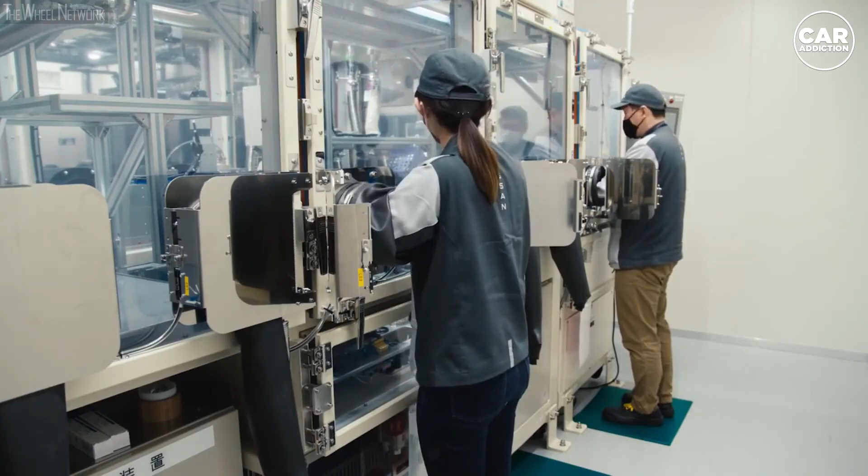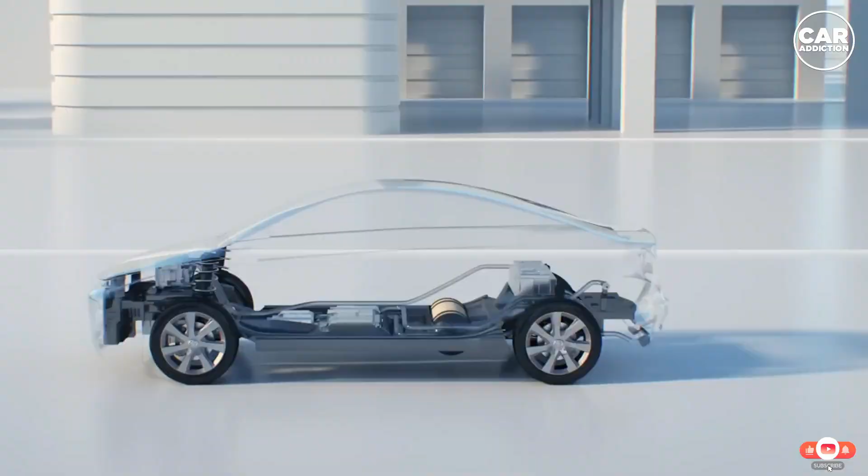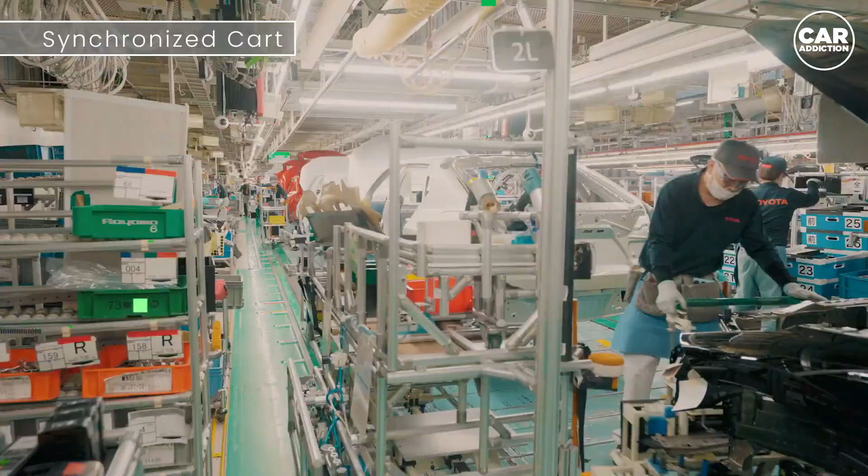New Toyota boss says solid-state batteries and synthetic fuels still need to evolve. Like his predecessor, Koji Sato believes hydrogen has a future. Replacing Akio Toyoda at the helm of the Japanese automotive giant, Koji Sato was appointed CEO on April 1. In an extended interview with Autocar, he spoke about how the world's best-selling car manufacturer should work on lowering its emissions on the road to becoming carbon neutral by the middle of the century per the Toyota Environmental Challenge 2050.

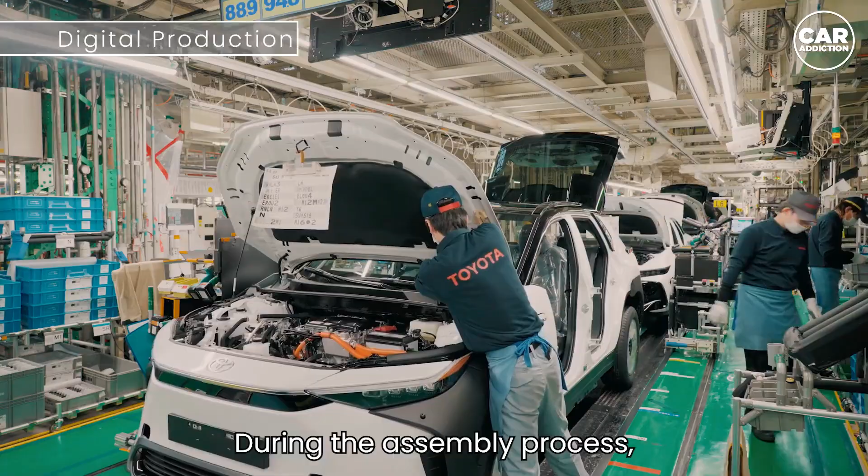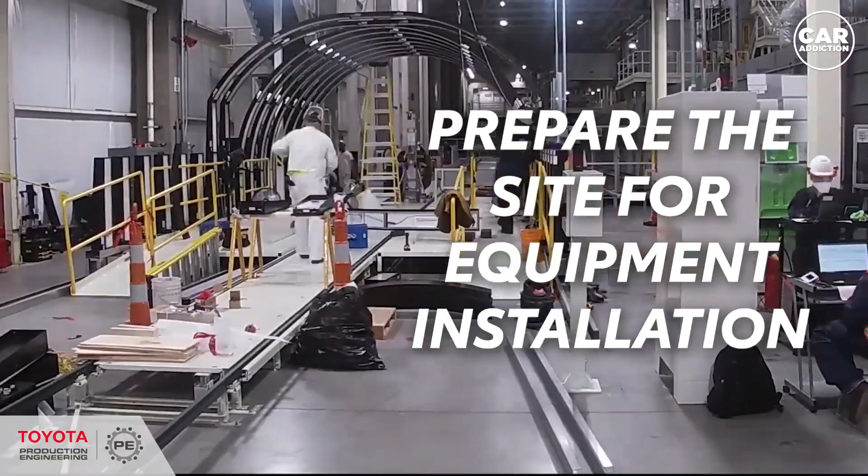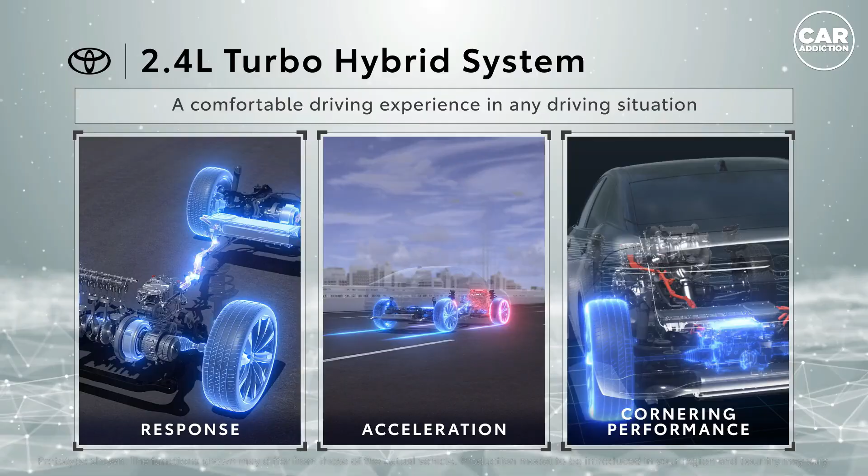He explained there isn't a single solution, as the plan is to invest in different technologies. Toyota faces quite a few hurdles, as Koji Sato said the durability of solid-state batteries remains a huge challenge. However, he remains optimistic. If we get through this point, the energy efficiency will be really fantastic. We're on that, but we still need some time. In January 2022, Toyota announced it would have a hybrid with a solid-state battery on sale by 2025.

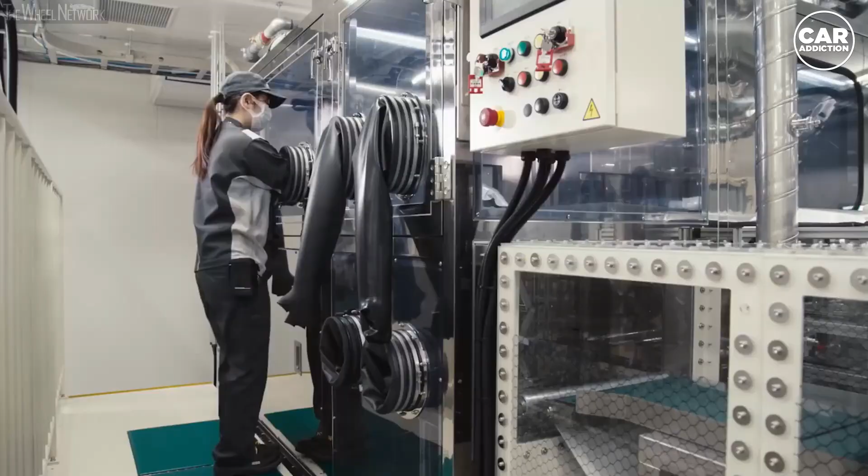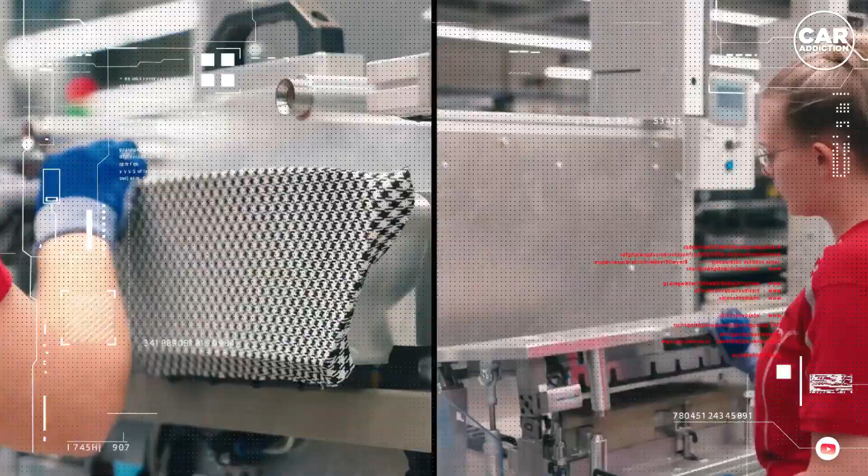Synthetic fuels also need time to evolve, according to the 53-year-old engineer. He mentioned the energy necessary to create e-fuels is still too high, and only further technological progress will make them feasible for mass production. It's worth mentioning Porsche has started production of synthetic fuel at its plant in Chile, as the sports car marque believes the ICE can be saved despite the inevitable EV future. However, Volkswagen brand boss Thomas Schaefer recently referred to e-fuel as being unnecessary noise since internal combustion engines represent old technology.

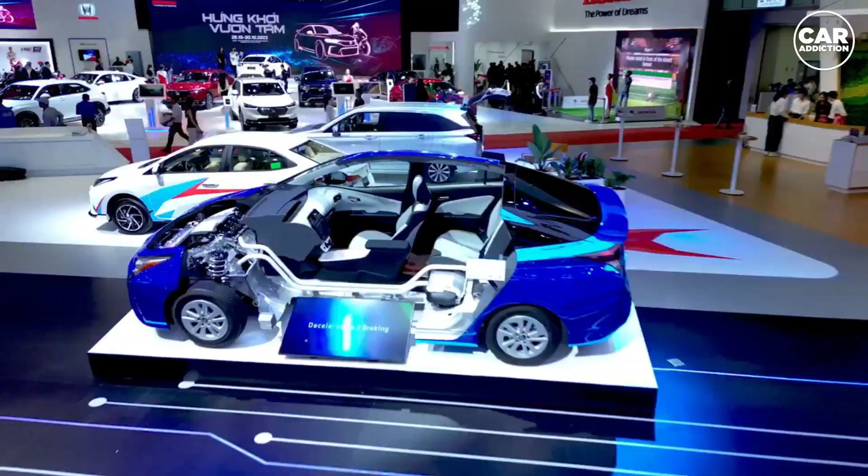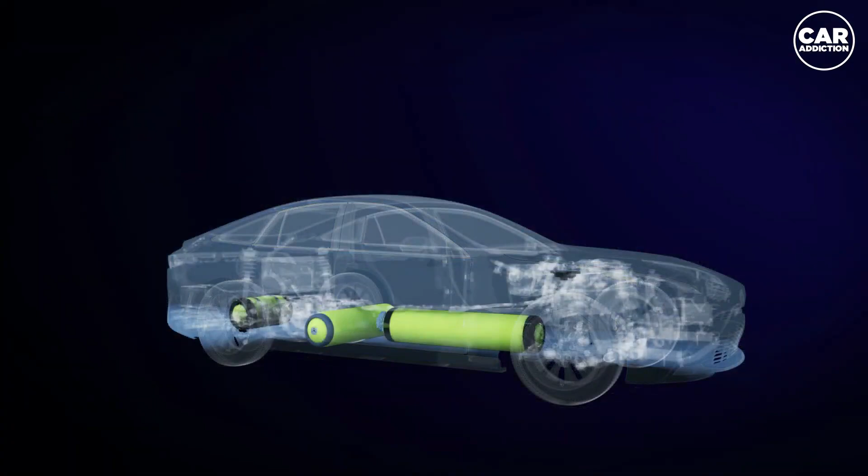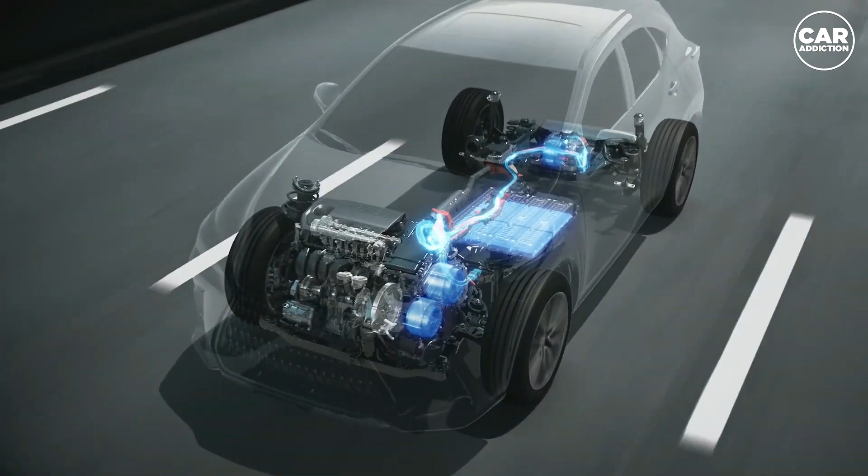Getting back to Toyota, Koji Sato admits the company he's now running might be lagging some rivals in terms of EV offerings by not offering a variety of zero-emission models. In a subsequent statement, he emphasized quality over quantity. It's not just about numbers, how many models we have on the market, but how good they are for customers and the environment. The newly appointed head honcho went on to add that cutting emissions should be done not only with hybrids, plug-in hybrids, EVs, and synthetic fuel, but also with hydrogen. He wasn't referring strictly to fuel cells, but also to ICEs modified to run on hydrogen, which are already found in experimental GR Yaris and GR Corolla race cars.

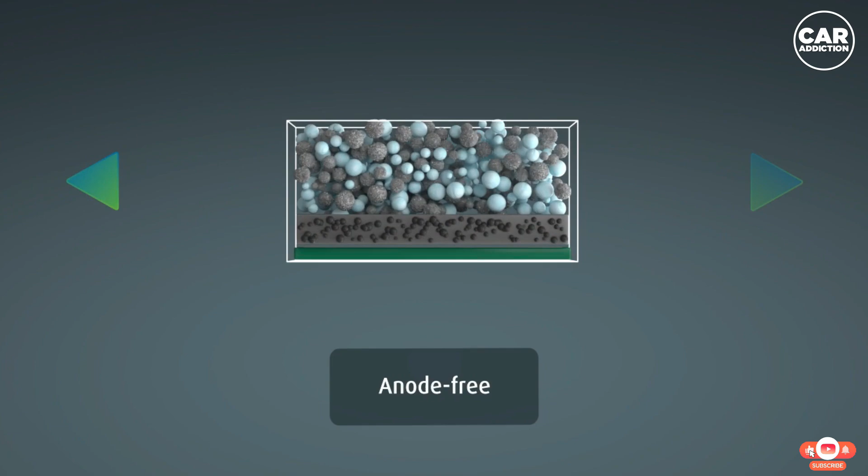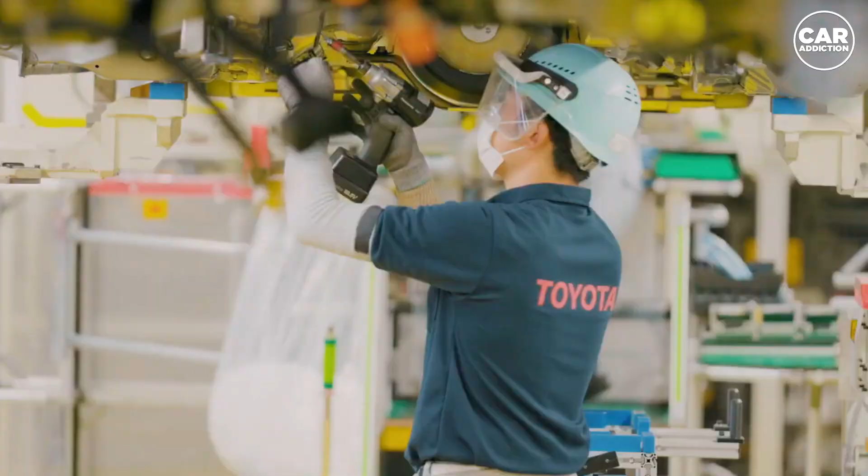What nobody is telling you about solid-state batteries. Solid-state batteries could offer massive advantages over current lithium-ion battery tech, but they are not quite ready yet. Solid-state batteries have been promised by major car manufacturers for quite some time now. Toyota, one such car maker that invests in the development of this technology, intends to launch a hybrid car with solid-state batteries by 2025. Solid-state batteries are the foremost in terms of battery technology for the EV future, coming to fruition faster than a lot of legacy automakers expected.

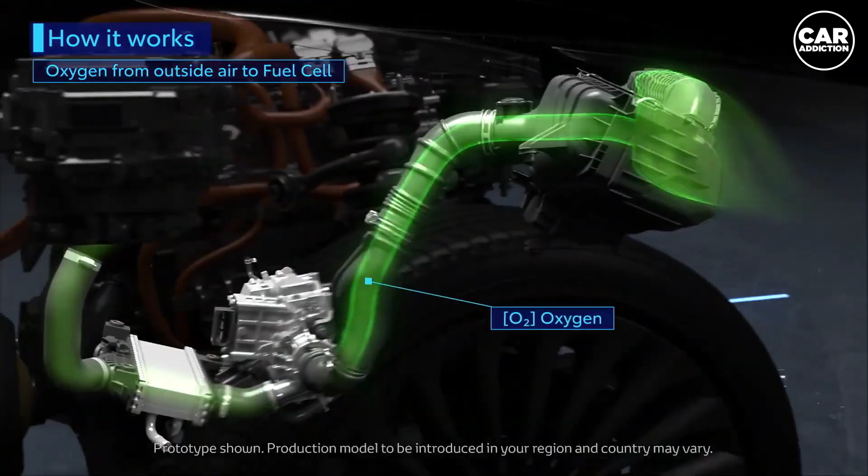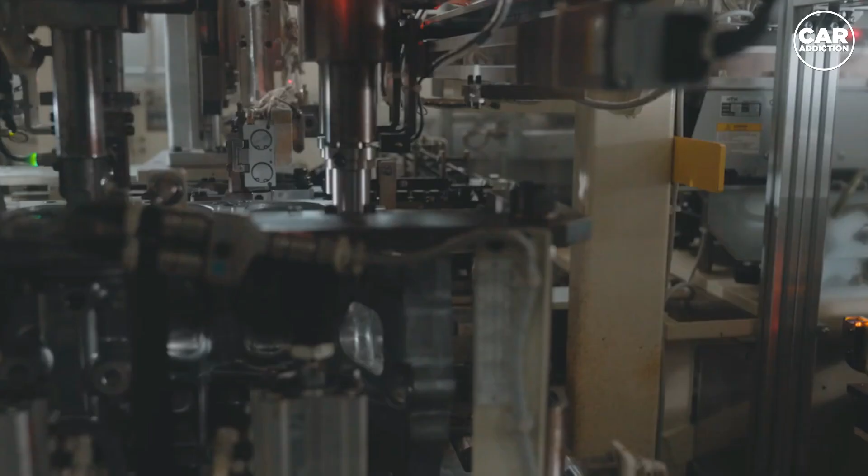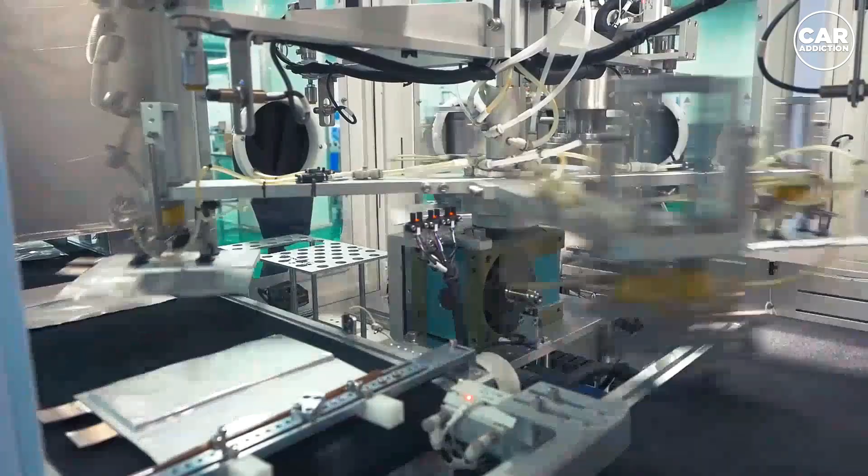This battery technology should deliver a longer lifespan than currently used lithium-ion batteries, more range, and faster charging times, among other benefits. Since legacy automakers are banking on this technology to hit mass markets by 2025, people waiting for some nuances of owning an EV to be addressed to pull the trigger on buying one should be excited. But why wait until 2025? What are the challenges preventing the widespread use of solid-state batteries right now? Is the advancement toward this technology noticeable, or is it stuck in time? Here's what's been going on with solid-state batteries.

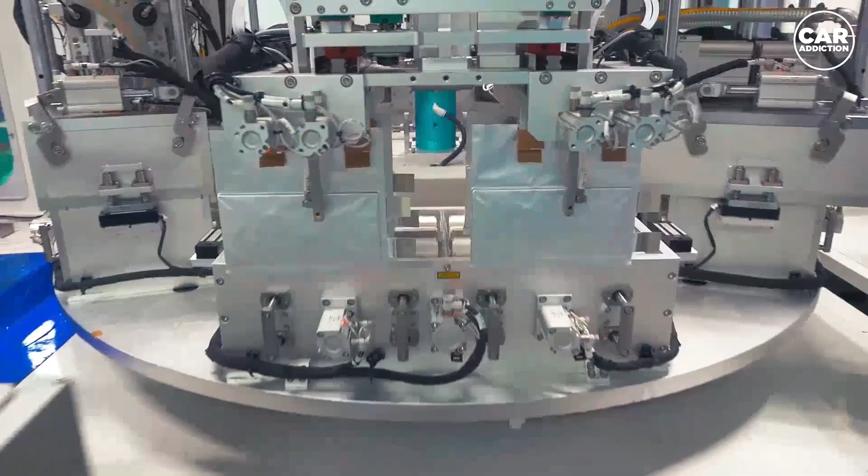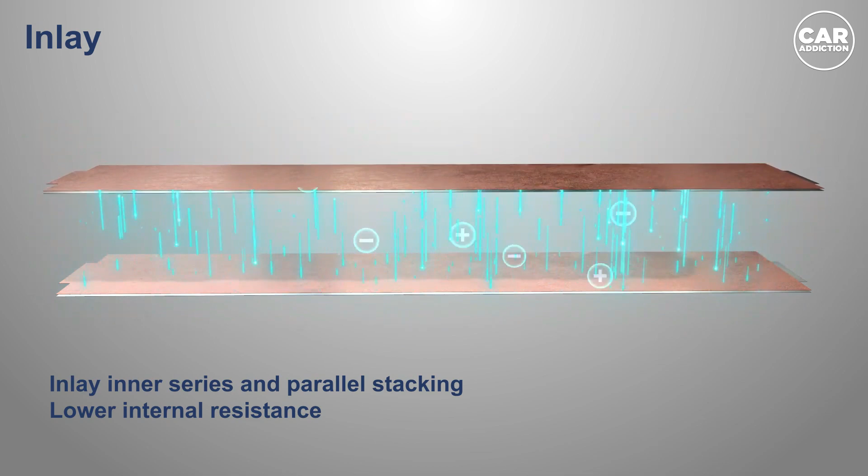There are still tricky issues for a viable EV solid-state battery. The challenges posed by the use of solid electrolytes versus the current liquid electrolytes in lithium-ion batteries are many. The stability of these batteries is usually poor, and their high surface resistance limits their output and concurrently their applications. But advancements are, in fact, happening, and on more than one front. From companies like battery manufacturer QuantumScape to renowned universities all over the world, such as Harvard in the States, as well as Tokyo University of Science, among others, from legacy and BEV car makers to even NASA.

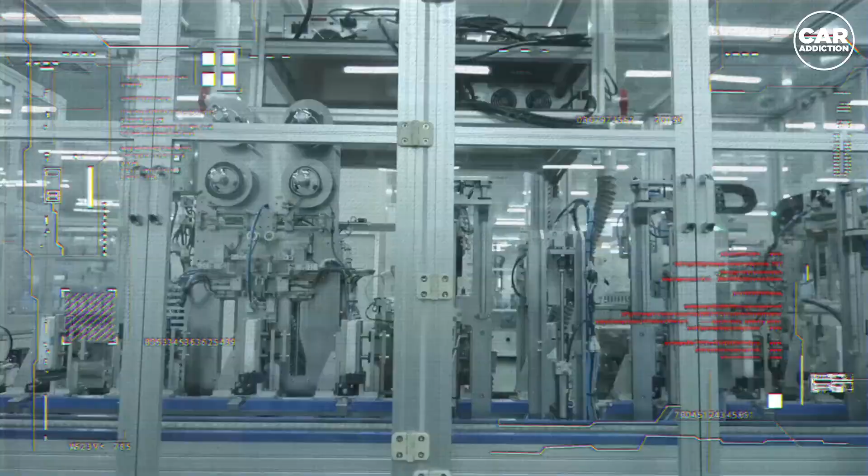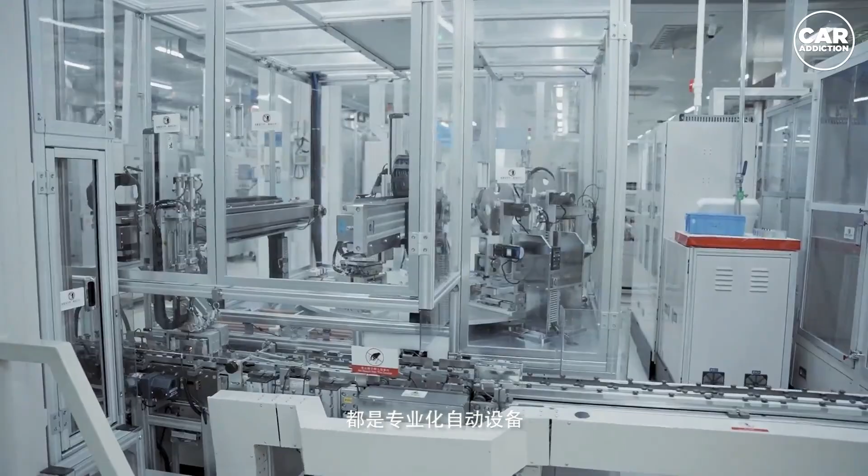Many institutions are working on improving the technology, fix its issues, and make the leap toward mass market application. The widespread commercial application of solid-state batteries is currently faced with a still unknown challenge. Exactly how the surface resistance shown by these batteries happens continues to be something that evades researchers' knowledge, and is linked by them to a phenomenon called the electric double layer.

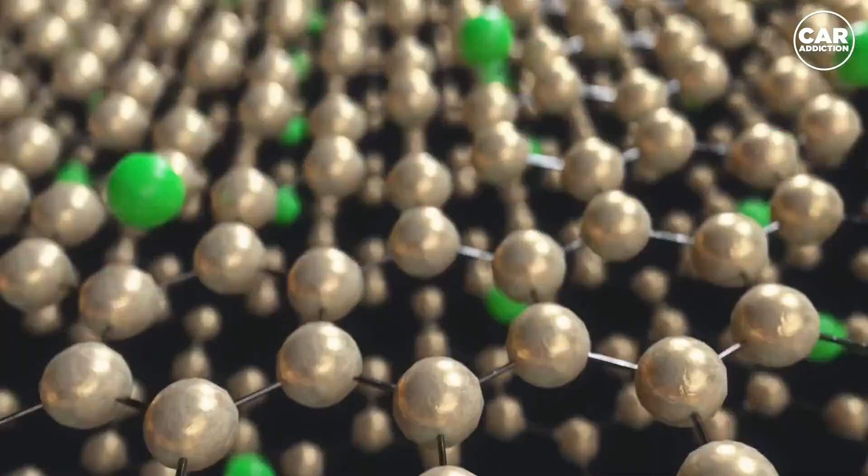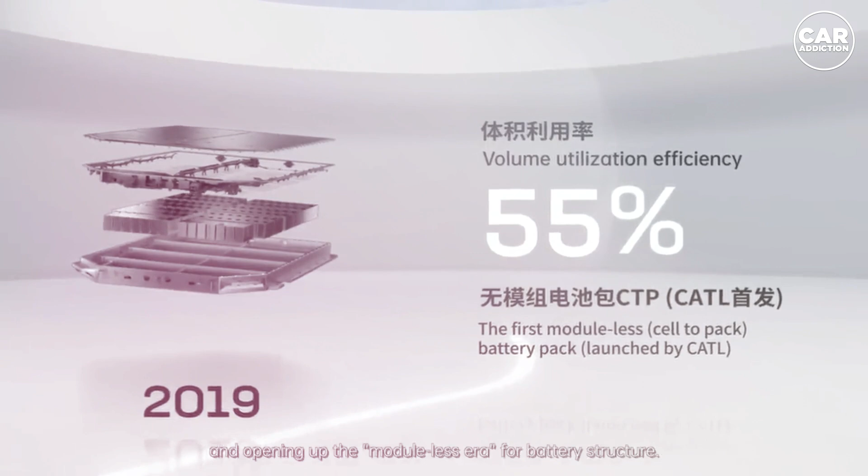This EDL effect happens at the solid-solid electrolyte interface, an issue that for obvious reasons doesn't happen with liquid chemistry batteries, such as the ones used in BEVs and hybrids today. Solid state can be a game changer, but there are a few milestones to be reached. This unpredictable EDL effect is one of the main reasons solid-state batteries aren't available on present-day EVs.

But as researchers' optimism remains resilient and more resources are put into it, it seems reasonable to believe the needed breakthroughs for solid-state batteries will happen in the coming years, if not sooner. All this research and development is, after all, highly fueled by the gigantic EV market in the world today. As the saying goes, money talks, and there is a lot of it to be made with suitable solid-state batteries.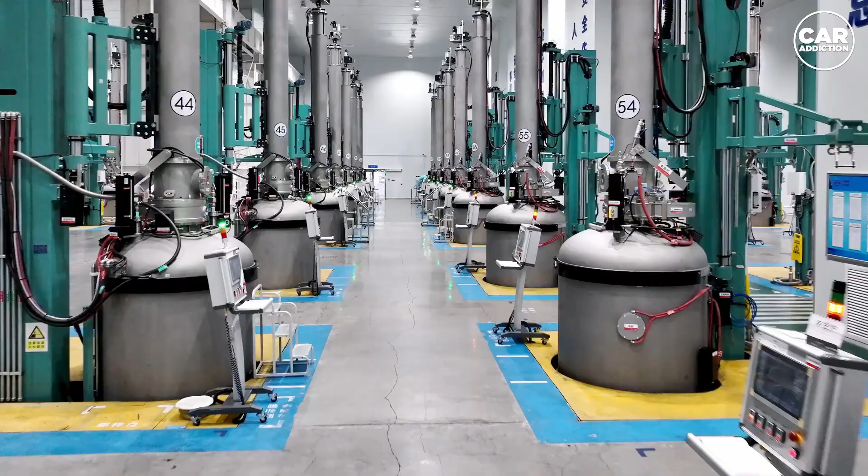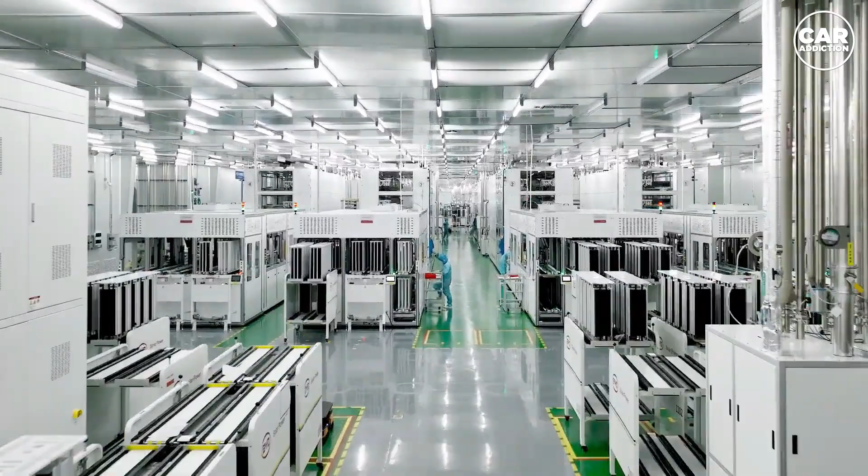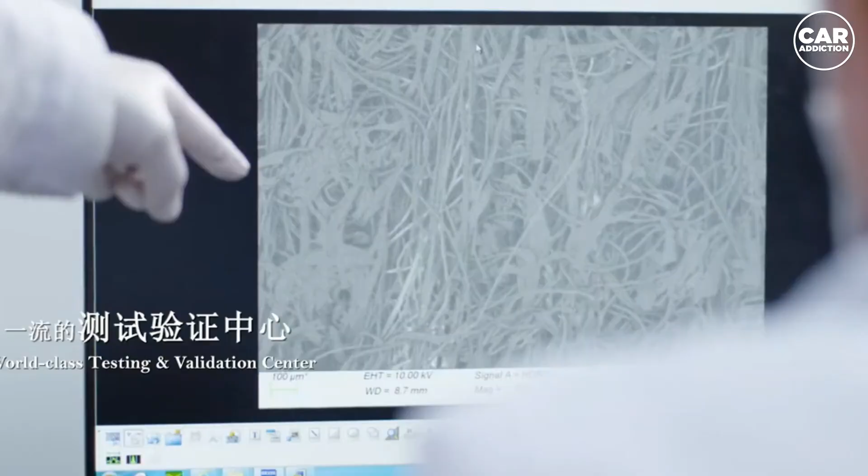Different approaches to building a solid-state battery are being tested, and the EDL effect is being reduced, to the point where it is becoming more predictable. But there are other problems solid-state technology faces, like the further development of current liquid chemistry batteries. CATL, the world's largest battery manufacturer, has experimented with sodium-ion batteries, as well as the U.S. Department of Energy's Pacific Northwest National Laboratory.

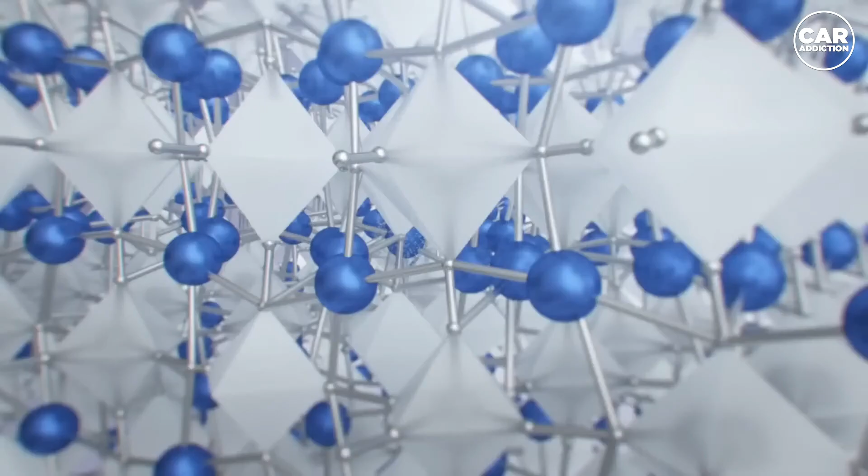Sodium has some advantages over lithium-ion batteries, one of them being the high availability of the material over lithium, but it also has some trade-offs. A hybrid battery pack that uses sodium as well as lithium-ion is also being tested by CATL and could make batteries more affordable and better overall for current BEVs. This solution could put solid-state batteries in check should their cost be prohibitive.

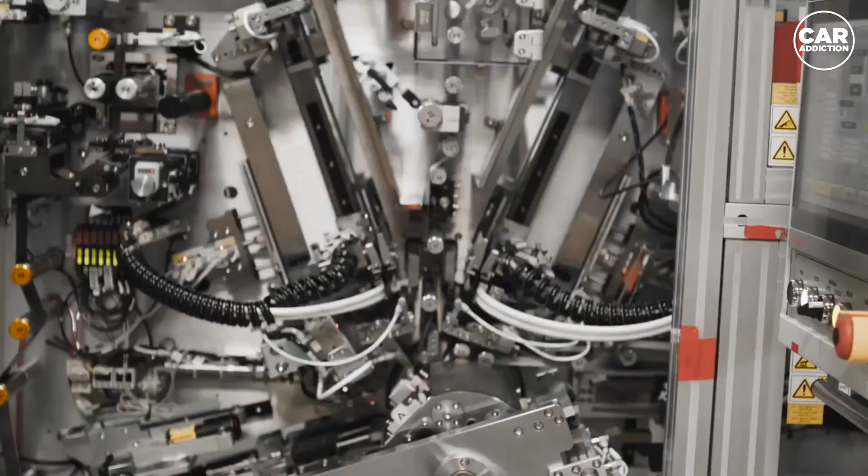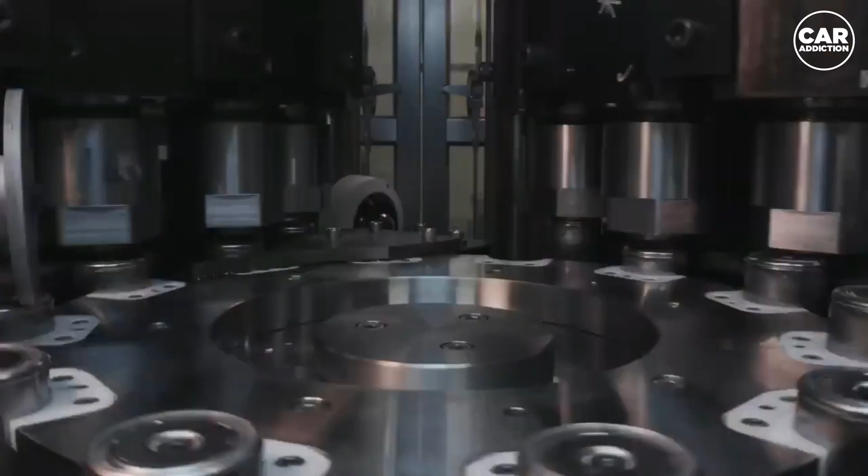Finally, conventional battery technology still has room for improvement. Battery technology has improved tremendously since the beginning of the current BEV revolution, and their cost, which accounts for a large portion of the BEV's price, has decreased proportionally.

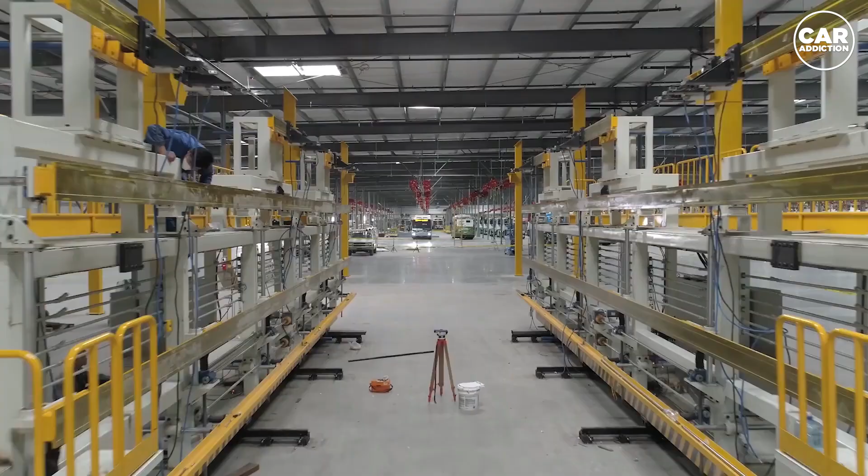BYD, the largest EV automaker in China, far ahead of Tesla in sales in that market, has plans to tackle the EV market stateside, and that promises to bring EV prices further down, much closer to current ICE vehicles, making the transition towards a BEV easier for customers. BYD already supplies a few cities in the U.S. with electric buses made in a factory built several years ago in Lancaster, California.

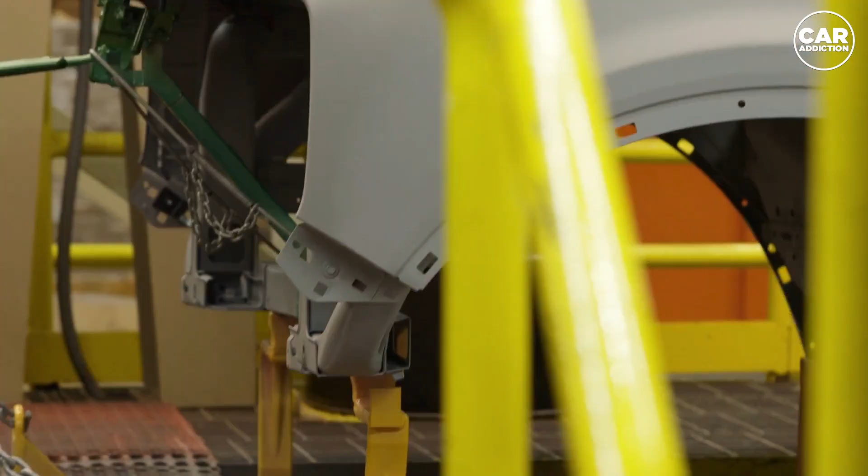They've been analyzing the American market for some time now, and when they come with all their resources, they'll do so with a sound strategy that could really shake things up in the EV market in the U.S. For a full ICE to BEV transition to take place as fast as possible, something that interests society as a whole, particularly due to environmental and health concerns, EVs need to be affordable, and that's why batteries are so important.

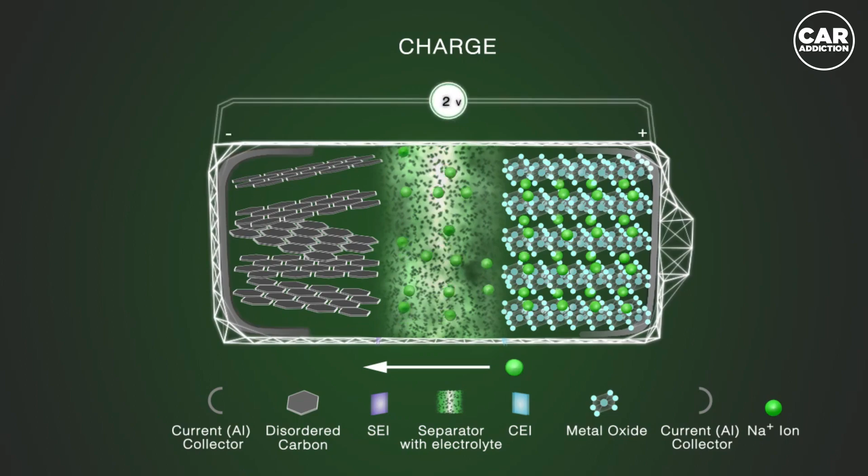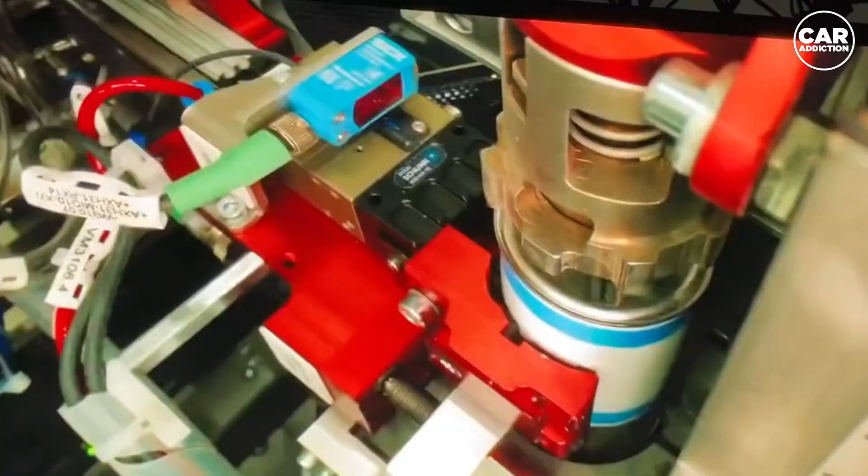They're expensive, and making them cheaper, either by scaling production or finding ways to make them more energy dense, enabling the use of smaller battery packs without compromising range, or even by transitioning to a whole new technology such as solid-state batteries, is key for a sustainable future.

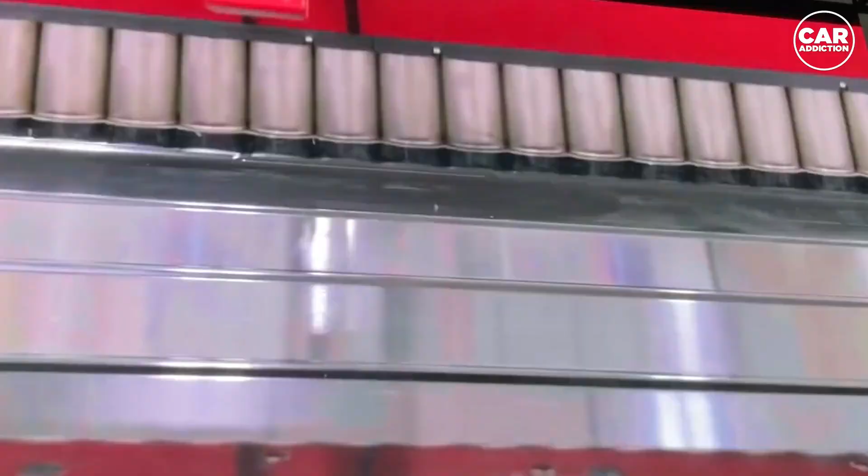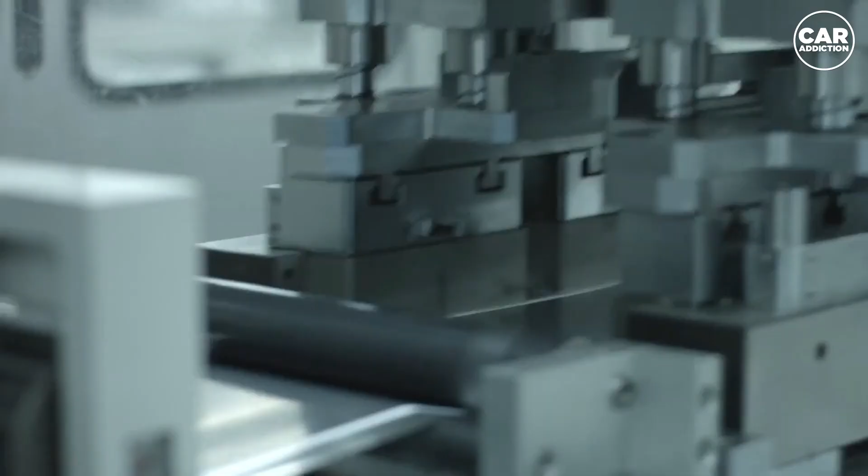Considering the advancements that have been shown so far, along with the expectations and plans of companies and research institutions for the near future, solid-state batteries should indeed become viable in the next couple of years. What remains to be seen is just how viable they will be compared to already existing batteries that will also be improving as time goes by. The technology will be there, but which one will win the mainstream is still anybody's guess.